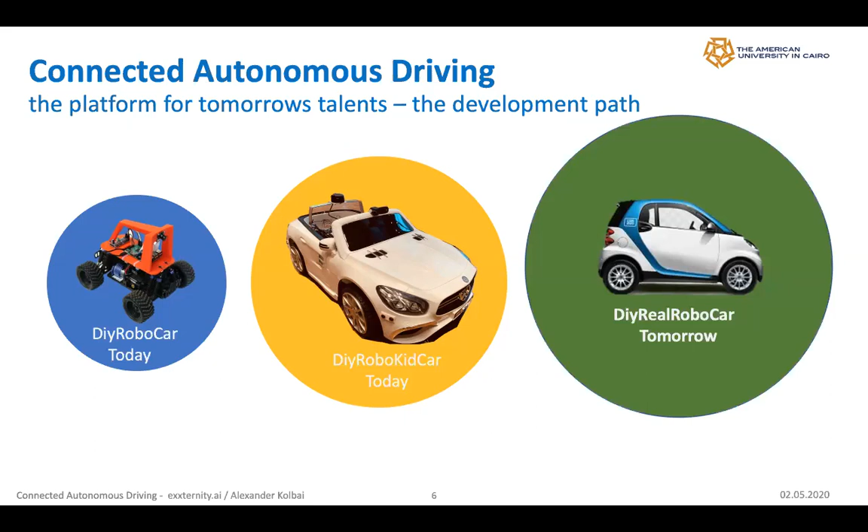And I'm also getting now to a bigger step. I'm building, or I built, let's say, a medium-sized kid car equipped with a lot of technology. I will come back later to this project, and the target is that after we get experience from the yellow from the Mercedes, we will equip one day a real autonomous car or a delivery robot or something like this.

So, if you're talking about autonomous driving, it's good to have a look back at the history, because autonomous driving is not new. There was a professor in Germany at TU Munich. Maybe you heard about the Hyperloop events from Elon Musk and TU Munich - they won this Hyperloop event 3 times, and now they are building their own Hyperloop.

One of these professors in 1980 was Dr. Dickmanns, and he was the first to develop autonomous driving together with Daimler. You can see some pictures here in the slide. In the year 1995, they drove from Munich to Odense in Denmark.

95% of the driving was autonomous, and this was 1995, so about 25 years ago. What they used was not modern technology as we know today - the hardware wasn't as capable, as strong or as fast as what we have today - but they had good algorithms and things like this.

But what they did is something like what you know today from YOLO, from object detection. They used a system they called machine seeing, so they made bounding boxes around objects and calculated the distance between their own car and the cars in front of them. This made it possible to drive the car on the street, and also make bounding boxes around the line marks on the street, what you know today as line following and things like this.

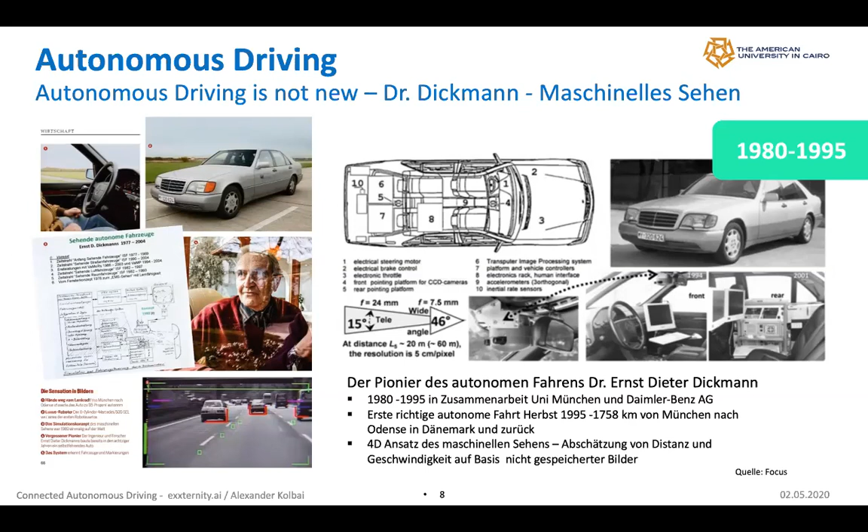And you see, this is not something new. Also in 2004 in the US, DARPA, the American Defense Organization from the American government, started a challenge in the desert, in the Mojave Desert in the US, and they gave the challenge of riding 240 kilometers completely autonomous. The people had to start the car, and the car had to run the 240 kilometers completely autonomously - nobody should intervene with the car.

In the first race, the car came only 12 kilometers, and then the race was over. Nobody reached the real finish. This was quite funny. So here's some videos of it.

Autonomous driving is very famous also from one company called Google, or now called Waymo. They started in 2009 with Sebastian Thrun, a German guy who was the founder or chief of the Google X department. They started to build autonomous cars already in 2009, and very famous was this small car which was everywhere in the media. They collected a lot of experience and a lot of kilometers in this car, and also found out how people react to this kind of car.

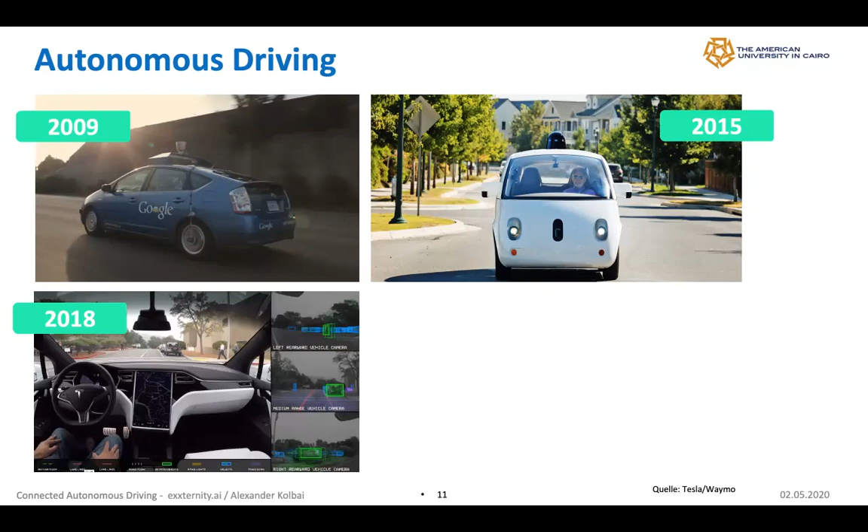And here you see the latest invention. It's a Jaguar, an autonomous Jaguar from Waymo, which they brought to the streets now. And they already have the license to drive completely fully autonomous in Phoenix, Arizona, and drive this car there.

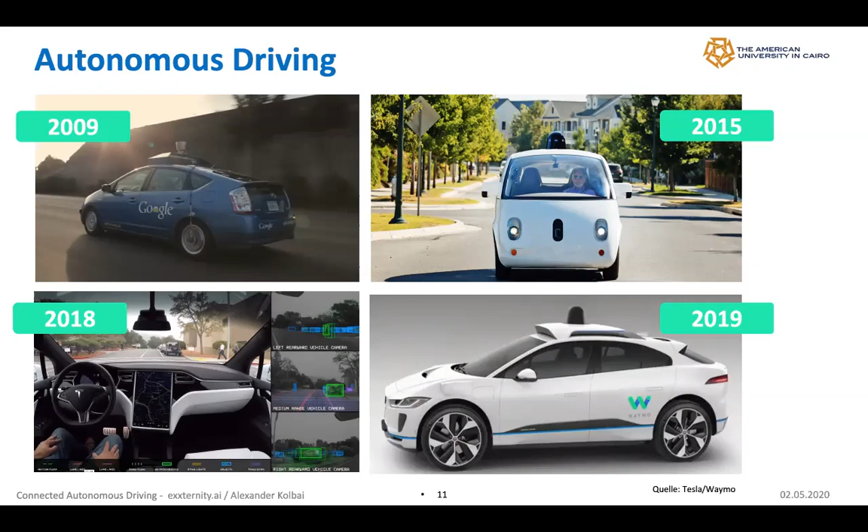Hashan, you still hear me? Yes. Okay, next, we can hear you very well. Okay, thank you. So if you have any question, please interrupt me, and if you don't hear me anymore or don't see the slides anymore, also interrupt me please.

So if you're talking about autonomous driving, we have to talk about different fundamentals. I will say, for example, about the 5 levels of autonomous driving. So we have 5 levels.

Level 0 is no automation, and level 1 and level 2 is what we already see for the normal OEMs which you know on the streets. They have a driver assistance system, partial automation, like line following, braking assistant, parking assistant, things like this. Audi also announced to come to level 3, but they announced 2 days ago in the media that they couldn't find a legal agreement with the European governments to bring out a new Audi A8 with traffic jam automation, which was driving the car at level 3. So all the OEMs actually are only driving level 2 or level 2 plus.

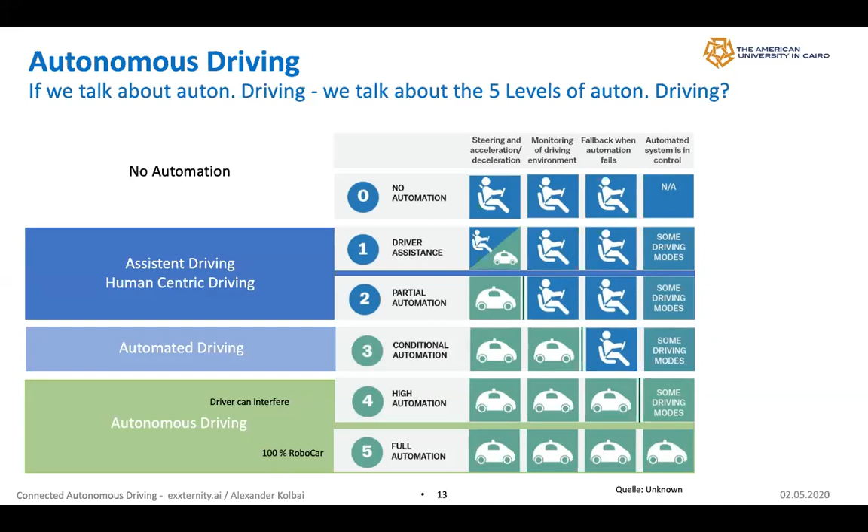And this makes things very complicated, because you will have non-automated cars on the streets, assistant driving cars, automated driving cars, and maybe a couple of autonomous driving cars. The organization of this will be very difficult.

And they also need to have the connection to the infrastructure, because they will communicate with the cloud, with the companies, with the central servers, and also with other participants on the streets, like pedestrians, bicycle riders, motor drivers, and things like this.

Autonomously, we are talking about what we discussed in the slide before, about assistant driving, automated driving, and autonomous driving. S stands for shared services, safety and security, which is much more important to me than shared and services, because safety and security, especially when talking about autonomous or automated driving, is a very important case, and also the part of IT data and information security.

Electric is a very important part for the future. We are talking about battery, H2, charging, battery production, and better efficiency programs.

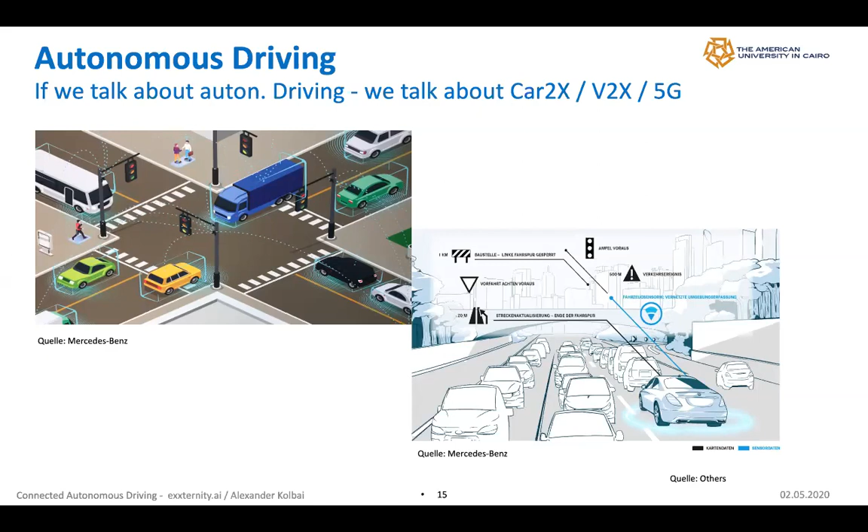For example, if you're driving along the street and there's an accident 2 kilometers in front of you, you will automatically get the information in your car: there will be an accident in 2 kilometers, or an icy street, or water on the street, or things like this. So this is very important for automated or autonomous driving.

If we also talk about autonomous driving, we have to talk about design and system development. The most important task is designing and developing a system that enables all driving tasks to be performed by the car, so the driver is fully free from driving. Another point is accuracy.

The vehicle must master all situations without the driver having to intervene. The car must be able to drive completely alone. And this is the real challenge.

We see different engineering mentalities in the US. They think it's enough if the car is good enough for 70 or 80% to drive on the street, and the rest of the experience we get on the streets. The German engineers say, okay, if the car is not fit for something like 101%, we don't give it out. So I think German OEMs are already able to drive autonomously, but there are a lot of different mentalities and security issues which don't allow us to bring these cars directly onto the street.

And also because we have a different customer experience of what they want on the street, because we saw a couple of accidents from Tesla, and they were all in the media about the autonomous drive standard in Tesla, which is still in a beta version, or they say it's not autonomous driving, it's only assistant driving. But a lot of people accepted it as fully autonomous driving.

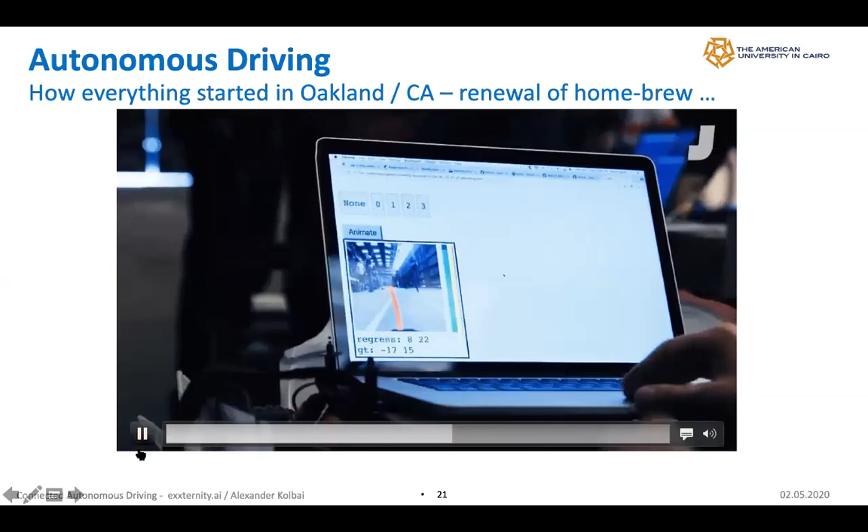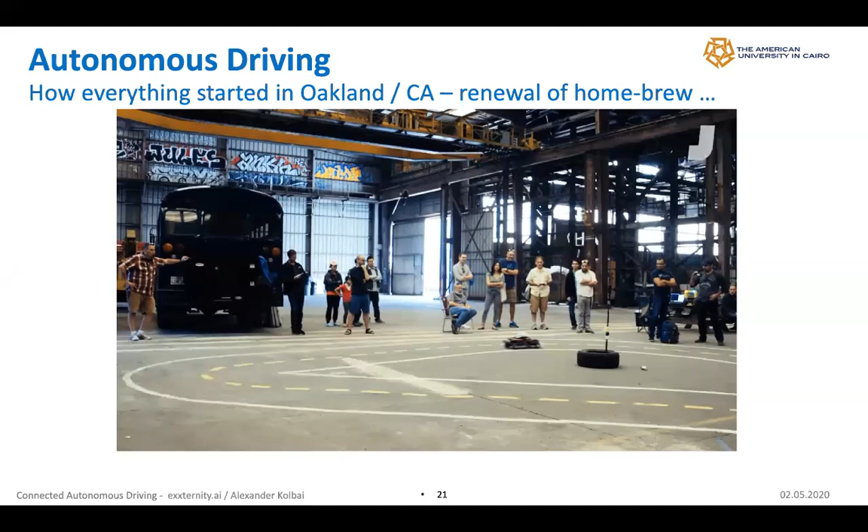What you can see here is one of the events they did in the United States. We do the same events here in Germany, a little bit smaller. But what you can see is that these are normal people - they are not people from the automotive industry. Maybe some of them are, but they are experimenting in autonomous driving at a very low level, and they have a lot of fun. Chris Anderson always says that if you do such events, it's important that you have a lot of fun together and things go well. Now I will come to the car and explain the technology in it.

It's quite simple - so it has a camera.

It's used to record the street and the lines. It has a Raspberry Pi or NVIDIA Nano, and it has a PWM board. The PWM board is important to control the motors, control the steering, and the motor board controller.

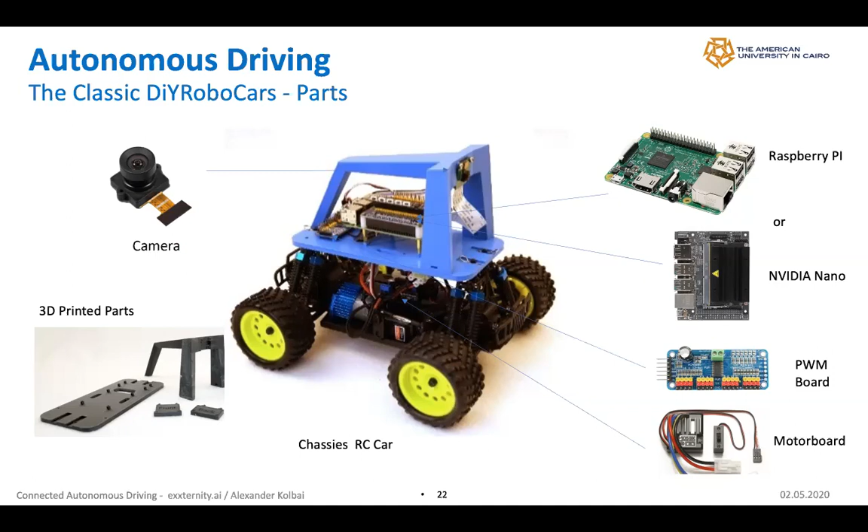So it's very simple. The chassis is from a simple RC car, which you can buy everywhere. The rest is mainly 3D printed, which is also easy to get, or you can buy it. The complete car costs around 300 bucks, 300 euros, and you have a small autonomous car. You need a controller for it, that's it, and a little bit of software which you can download open source from the internet. Then you can start to learn driving an autonomous car.

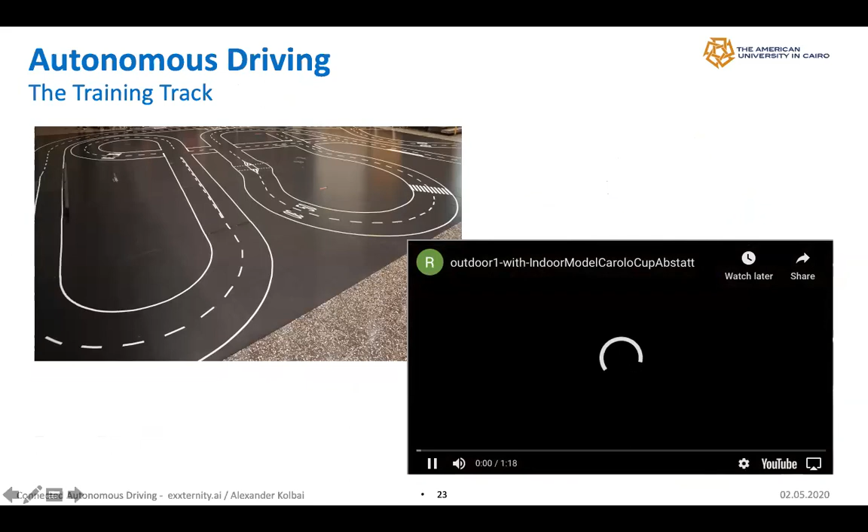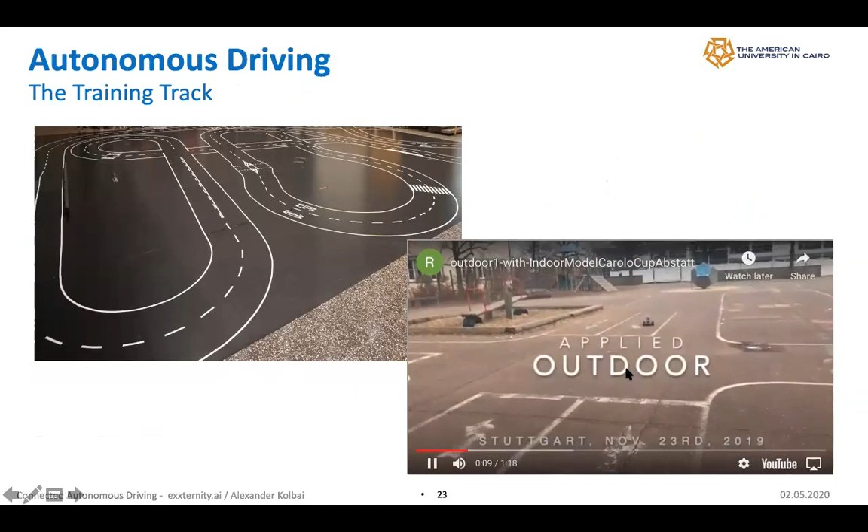So what is this car doing? It's what you see now here in the video. It's driving along this course, collecting the information of the course. It can also be an outside course - it's important that it has lines outside, and lines inside, and you can see it learned from the lines. Sometimes it didn't learn very well and does its own thing, what it wants.

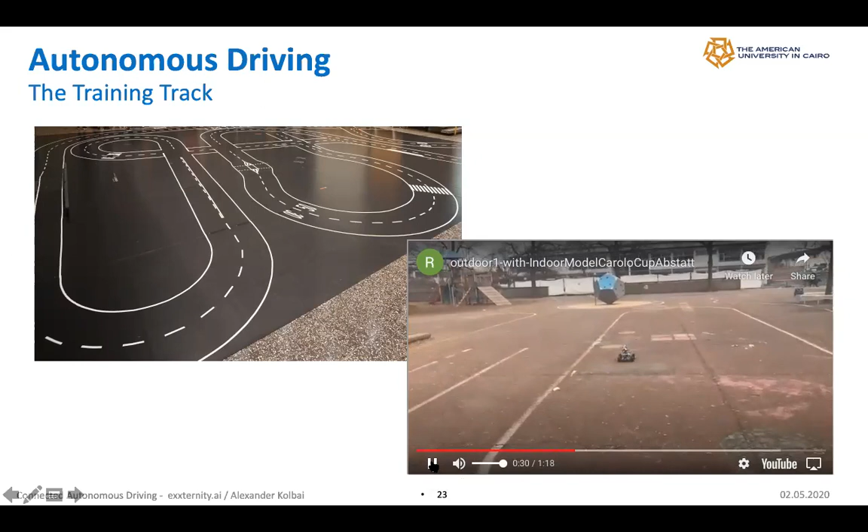So what is the system behind this? First of all, what we are doing is driving the car with a control around the course. In the image on the left side, you see the street or the race course. It has a left line, a right line, a middle line, and these three lines are recorded by the camera from the car. Then this information is taken, including the speed and the steering information, and collected into data.

This data is transferred from the car to a computer - you can use a laptop, your normal PC, or if you have an NVIDIA Jetson Nano on the car, you can directly leave it on the car. Then you train this data - I'll show you later a little bit what the network looks like. Then you create a model, put this model back on the car, and hopefully it will drive the course completely autonomously.

We call this behavioral cloning or imitation learning, because it learned that the street has a left line, a right line, a middle line, and when it sees something like this, it knows how to go along this kind of street. So it's a very simple idea of autonomous driving. But what we are also doing now is putting some obstacles on this track, and the car learns to recognize these obstacles and go around them.

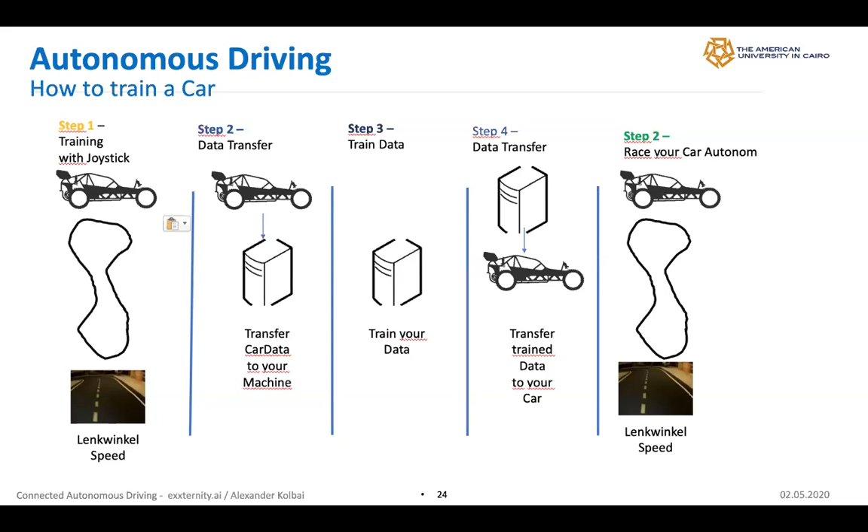So that's what I said before. First of all, we have this control, we race this car around the course, then we train it through a neural network.

Or we have the possibility to use this kind of simulator. Let me see if I can show you the simulator here. So if I have now connected a joystick, I can drive - let me see if my joystick is working here on this computer or not.

So I can drive this car in the simulator around this course, and collect the same data as I would normally on a real track, and also train it through the neural network. I'm too fast. So we'll stop, and exit.

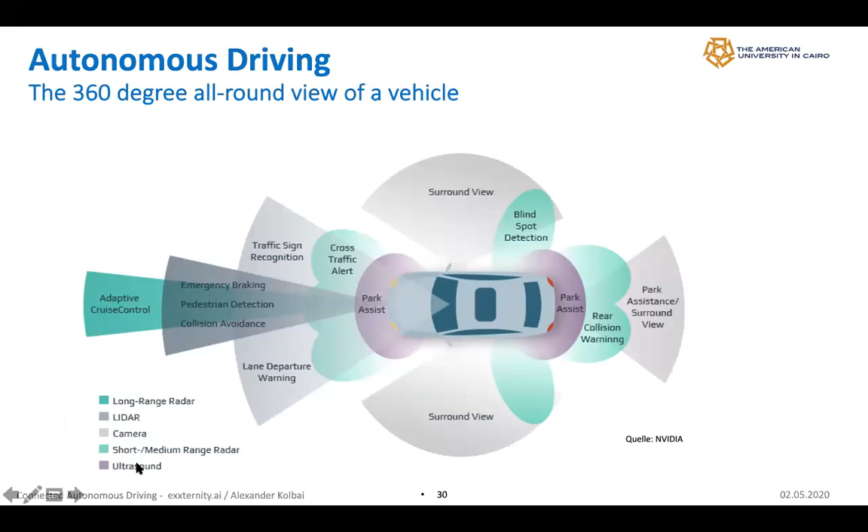So if you come now to DiyRoboCar, this was a very simple idea how to learn autonomous driving in a very simple way. But we said, okay, this is very simple, and we want to be more like a real car, which has a radar, a LiDAR, cameras, short and medium range radars, ultrasonics. So a couple of different or much more sensors, which the normal donkey car doesn't have. What we have in the donkey car is the camera, that's it. We collect the steering and the speed, but we don't have a radar sensor.

What you see here is the new radar sensor from ZF. It's very close to being like a LiDAR, but only in one direction. The good thing is it already has 192 channels, and you can create a point cloud out of it. What we also want to have in a real car is a LiDAR, whether it's a 2D LiDAR or a 3D LiDAR, and different ultrasonic sensors.

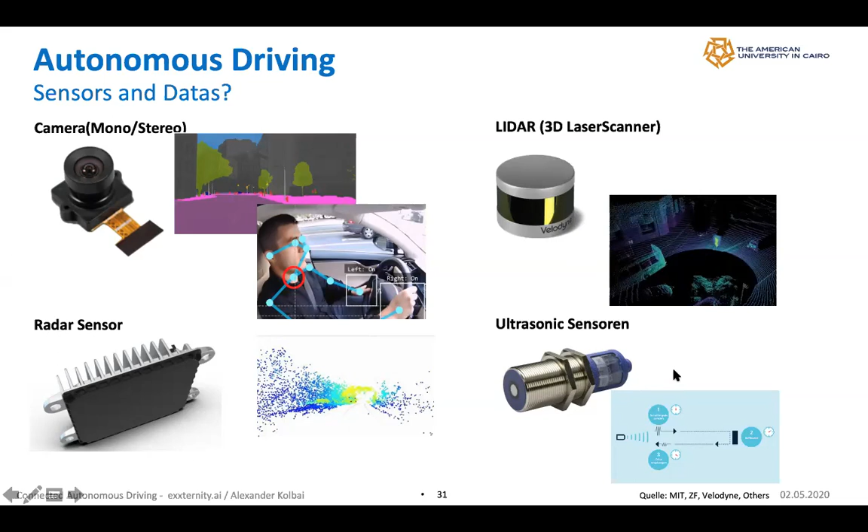So what we did is start to use a kid car. At the beginning, I used the kid car from my daughter, which I had in my cellar. It was an old Porsche. When she was 3 years old, she got it, and it was left in the cellar, and we equipped it with all this equipment you see here now.

And then we started to make it a little bit more sophisticated and equipped a modern Mercedes with modern technology. It has 2 cameras, one in the front, one on the top. It has a GPS connection, around 6 ultrasonic sensors, one in the middle, one on the left side, one on the right side, and the same in the back. It has a 2D LiDAR, a 3-axis gyroscope, cameras as we already said, GPS, and a panel.

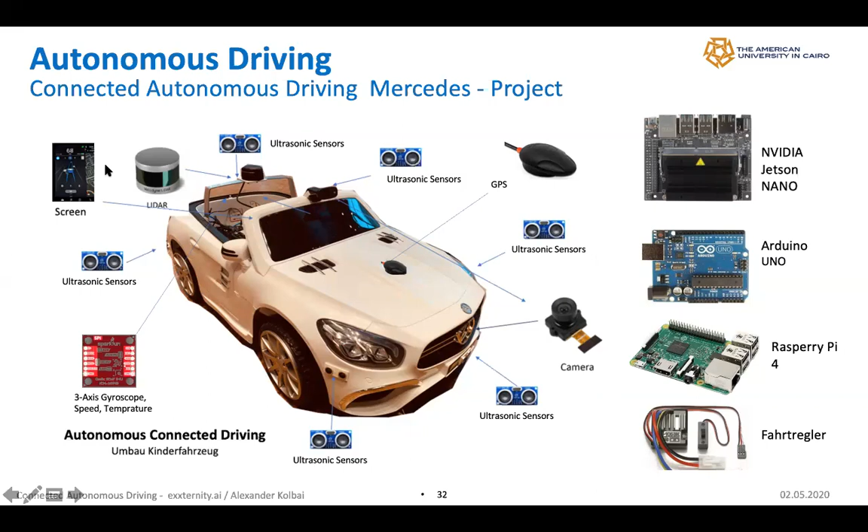So here is a small photo from yesterday. We drove the car around the street around our house, and I can show you some small video from it.

So what is the car doing? The car has a GPS line, and it's following the GPS line and controlling the driving according to its sensors.

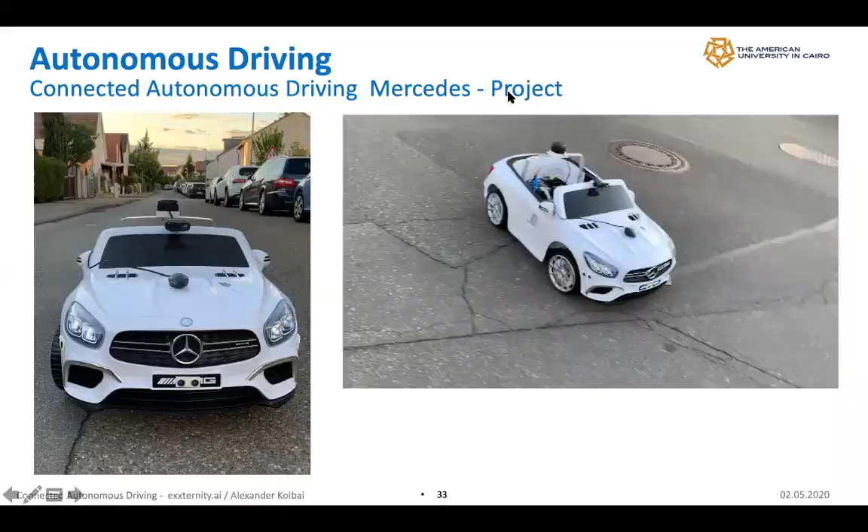I can show you now, I have this car here. Let me share. Can you see the screen from the car now? Yes, okay. What you see here on the left side are the ultrasonic measurements, which are collected.

They are recorded on an SD card. We have the LiDAR information. This is the LiDAR information you get now in my room here, because the car is standing next to me on the floor, and we have the camera also here.

We can use directly YOLO on the car. It's built in, we can directly make object detection with YOLO on the car. But here it makes no sense in the room to show it, but let me see if I have some videos here. We can do it later on.

So this car has a lot of sensors, and I will get back to the presentation.

Can you see the GPS information now? Yes, okay, so this is what we collected yesterday, for example. We drove the car around our area, and first of all, we collected the GPS information from this area. So the GPS sensor took the GPS line.

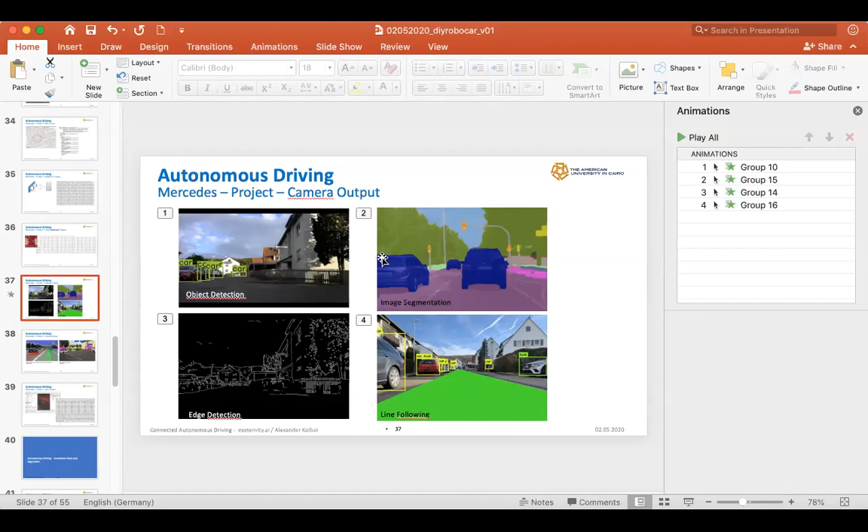So back to the presentation. This is the output which you can get directly from the car. You can see here the object detection made by YOLO from the car. So he detects everything. My daughter already jumped sometimes in front of the car. He also recognized street signs, important.

So you give the camera or the car the information about what he's seeing over the camera, because the driver is not steering the car. That's why image segmentation is a very important technology, because you can use it internationally. If we're developing autonomous cars, we develop them internationally. So this kind of information you can use in Germany, in Egypt, in Japan, in the US, because everywhere you have cars getting a blue color, the streets getting this pinkish color, the sky, the lighting systems and things like this, and you have an international standard to use it.

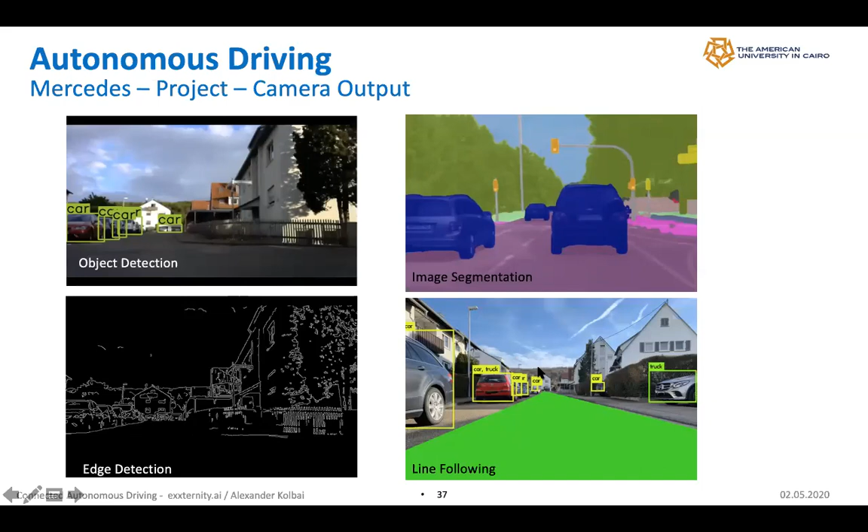We use this kind of edge detection so the car can predict where he is going and can see the street. And also this line following combined with YOLO object detection. This is a street where the Mercedes was going yesterday, so he knows where he can go and which is the space he can use.

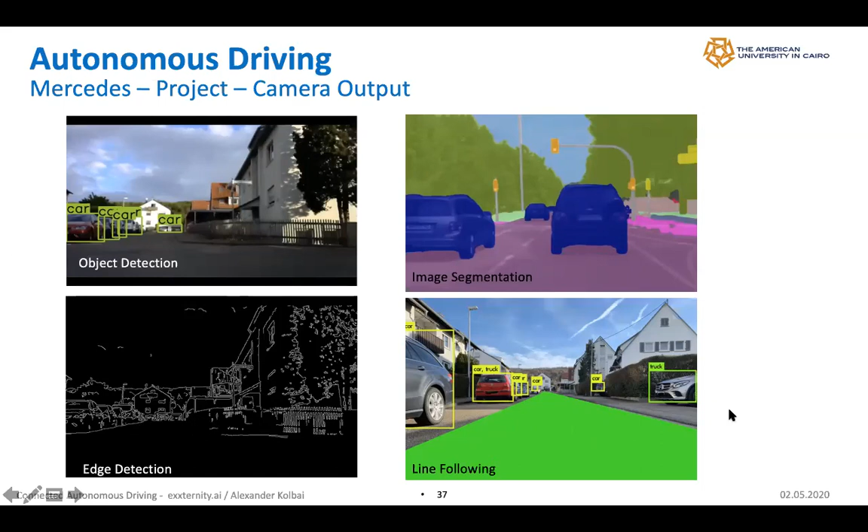And last but not least, the LiDAR information, what we collected from the LiDAR, which we can run in the RViz, and the Mercedes car, for example, is running on a ROS environment, combined with other different algorithms. So we can use the LiDAR on ROS and get all the information from the LiDAR and all the objects around, because the good thing about the LiDAR is that it allows us to get a 360 degree view around the car. For example, if you have a radar, you only see in one direction.

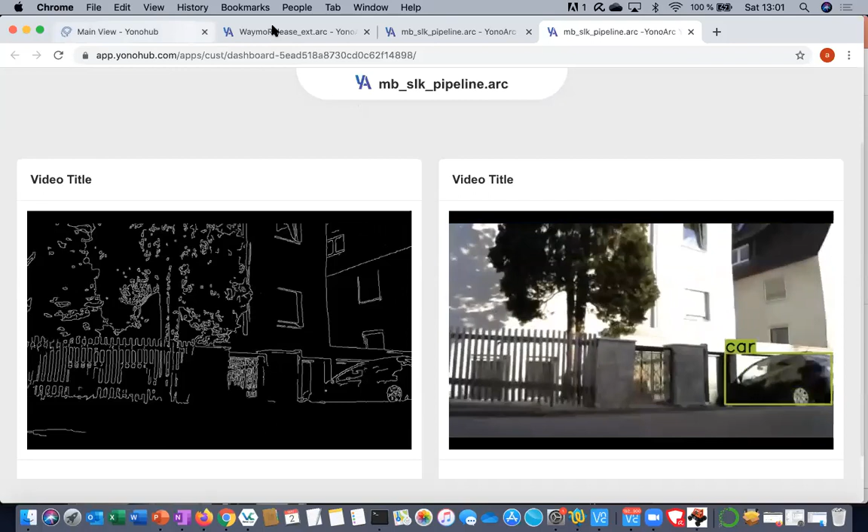So what is YonoHub? It's a platform - I'd call it an AI development, testing, simulation, and collaboration platform. On one side, you can develop your own algorithms, for example in Jupyter or Visual Studio, and then put them into blocks, which you can see here. These are the blocks, and it's very easy to create your own environment.

I'll stop here and show you how easily it's possible to do this yourself. So I have, for example, a video player, then a video viewer - let's say we have two - then I'll use YOLO detection, what we had before.

Then edge detection, and we need some boxes which will be drawn from YOLO around the objects. Now, I'm not a developer, but I can use YonoHub to build my own pipeline. So very simply, I'm connecting these blocks by marking them, then Control E, and it connects them to each other. I'll do the same with the rest of the three blocks, and that's it.

The only thing I need to do now is browse to my video, which was recorded from the car. Let me see the videos. I'll take another one, not the same one you saw before. Okay, I'll call it 'test', save it, and then I can start the pipeline - you can see different colors appearing down there.

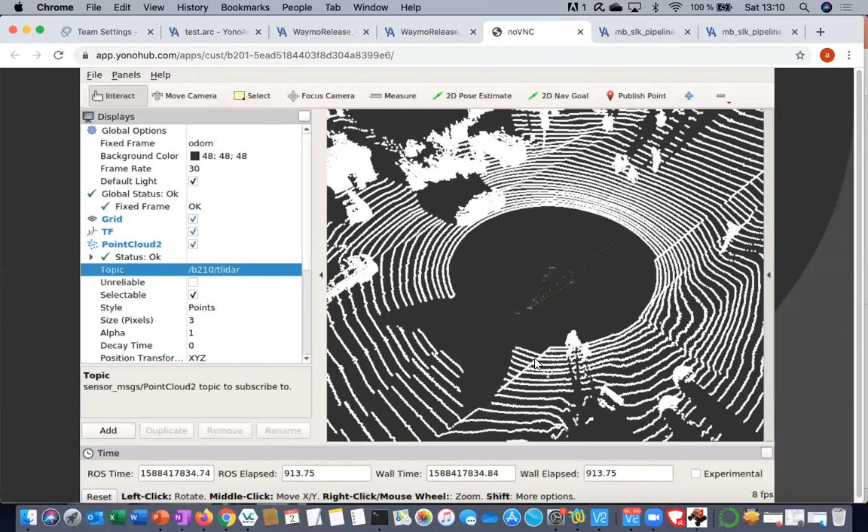So this is different. This is the front camera. This is the side camera, and here you can see the people walking along over the pedestrian street, what you saw already in the LiDAR information. Let's see. Here you can see them walking over the pedestrian street. And you see also here different kinds of cars, bushes, houses, and things like this.

So all this information we can visualize in YonoHub. We can develop our own algorithms in it, stuff them into blocks, build our own pipelines, test this data, see what this data gives as feedback, optimize this data.

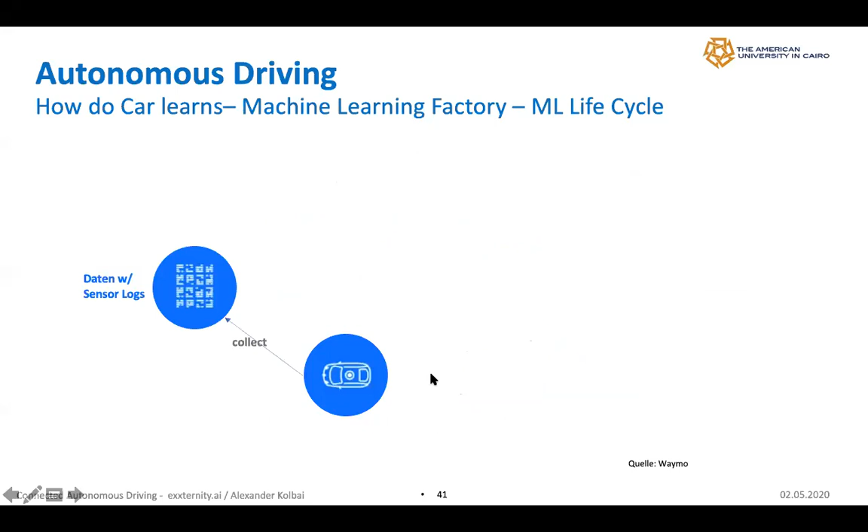So the main thing from Waymo is, first of all, they're not concentrating on building a car. They can use any car. But what they are doing is concentrating on developing their own sensors - cameras, lidars, radar, ultrasonic sensors. They have their own algorithms like TensorFlow and others they are producing. They have their own data centers, very huge data centers, and they have the money to get the best people in the world to develop autonomous driving for them.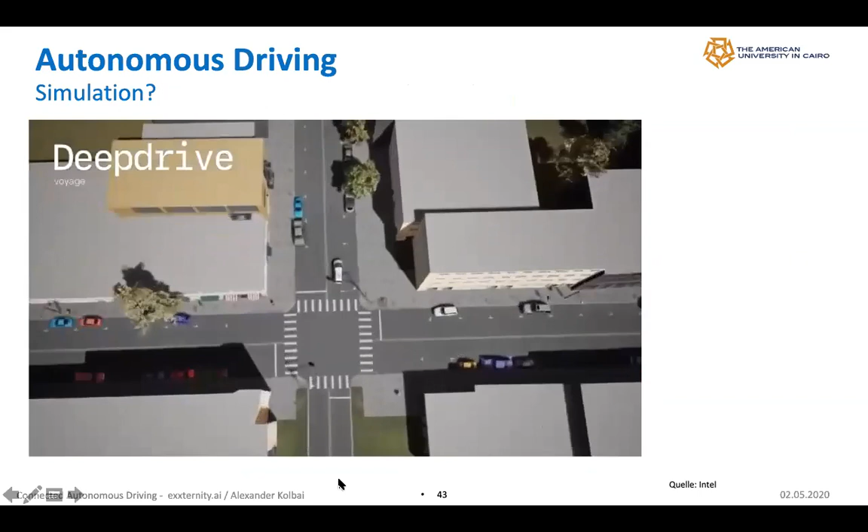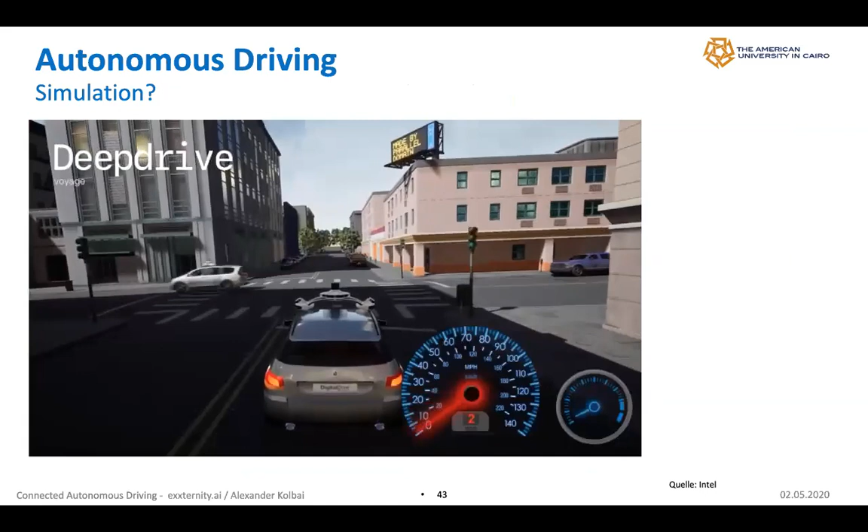One of the famous simulators is Deep Drive. It's from Voyage. Voyage is a company also in the US, coming from the Udacity team. This was outsourced from them, and they developed a simulator. It's like a real video stream on the street, called Deep Drive, and these kind of cars collect all the information in the simulation.

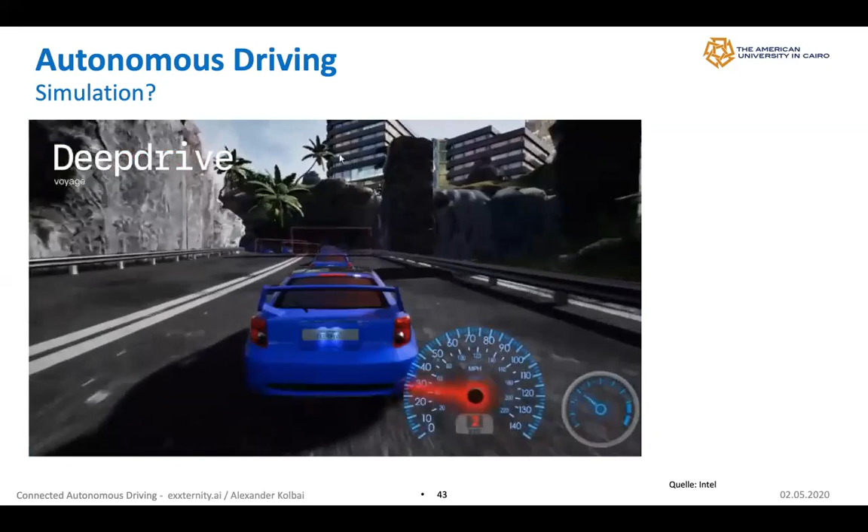The good thing about simulation, what you cannot do on real streets, is that you have special situations like what you see here now. For example, a ball runs onto the street, or some obstacle is on the street which is normally not there. You can produce all this kind of scenery which you don't have on real streets every day, and which you cannot collect with normal cars. This is the good thing about simulation.

The live demo we already saw before. So what is our aim?

When we go back to the DiyRoboCar number 2, which has the different sensors, the next step should be to put this framework on a kind of delivery robot, not a real car, but first on a delivery robot, and see how it works, because it has the same sensors as our Mercedes. It has a LiDAR, ultrasonic sensors, cameras, and can be controlled externally. If this works, we can start trying to put such a framework on a real car. So this is the idea: from the pipeline on a very small DiyRoboCar, or a bit bigger with more sensors, then going to a delivery robot, and at the end putting something like this on a real car.

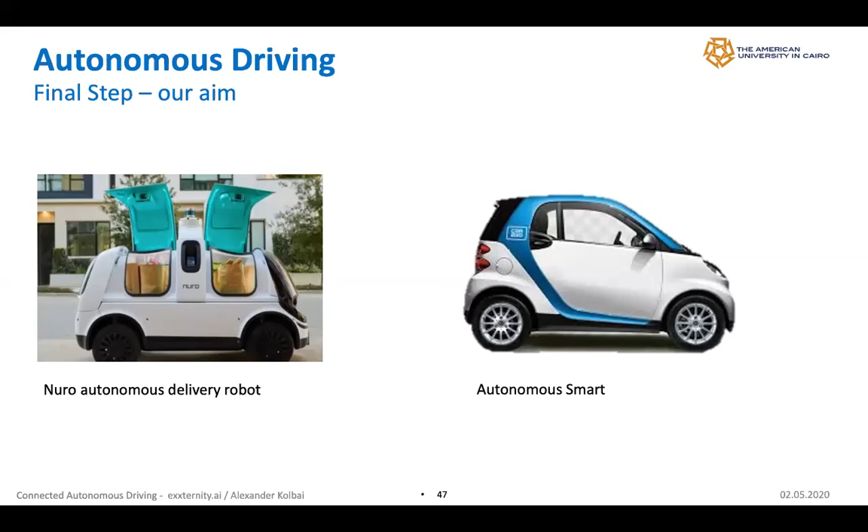That's why we call this democratizing autonomous driving, because this is something not everybody can do, but everybody who is interested in autonomous driving can get into this technology. The frameworks are available, the data are available, the tools are available, and there are a lot of teams around the world working in this area. It's a fascinating technology, a fascinating future technology, and very, very interesting.

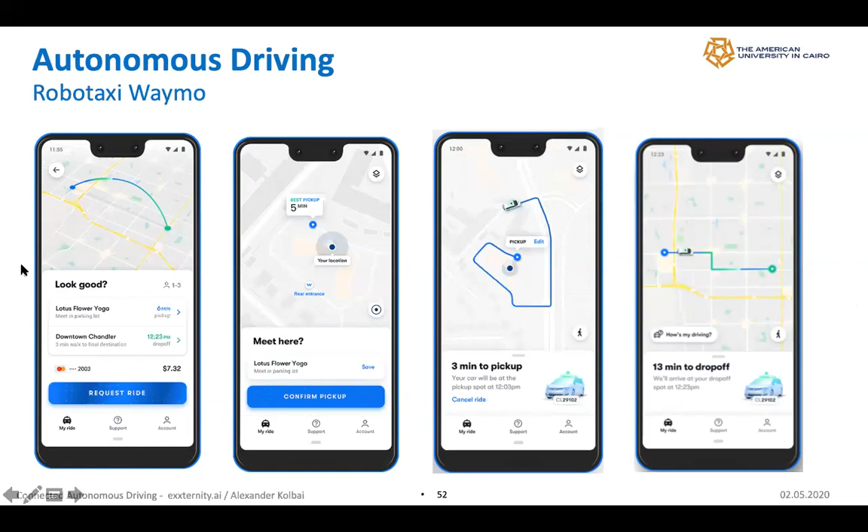So where we are today: the traditional OEMs are somewhere between L2 and L3 assisted driving. There are a couple of companies, let's say L4, but still with a security driver - especially Waymo, Voyage, and I think Tesla will be very soon there. There's also Cruise, an American company.

What is coming more and more are these autonomous shuttle buses. There's a company called Navya, a French company, and they already have around 150 shuttle buses implemented worldwide. They drive autonomously in a defined area, working the same way as I showed with the Mercedes car.

First, they collect GPS data, so the shuttle bus knows where it has to go, and they use the rest of the sensors only to detect obstacles around them and decide how to act with those obstacles. The next one is air taxis.

Maybe you heard about Volocopter. It's a company from Germany, also invested in by Daimler. But I'm not so sure if this will be the next big thing, because I don't want to have as many air taxis in the air as we have cars on the street now. I don't want to have any of them over my head.

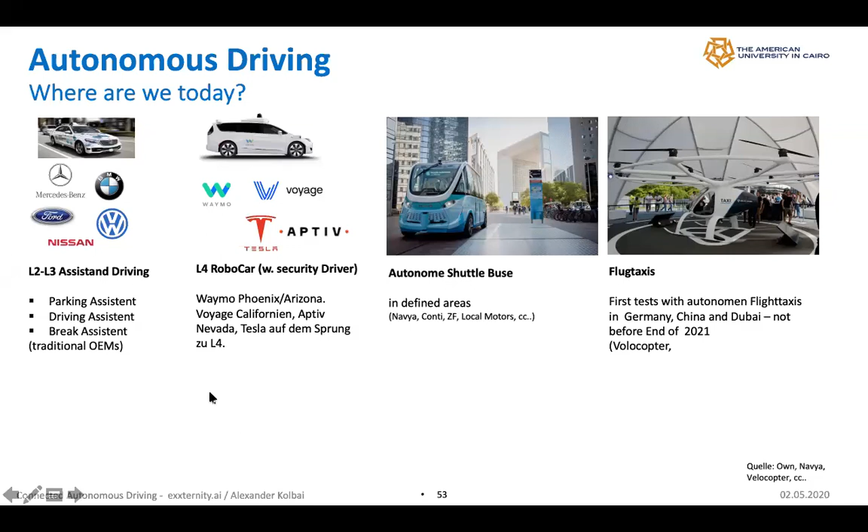I think there will be a market for it, I'm sure about that, but it will be something like a helicopter for special locations - like Dubai or New York - where you fly from A to B in a very limited area. But where we already have autonomous driving is in the logistics area.

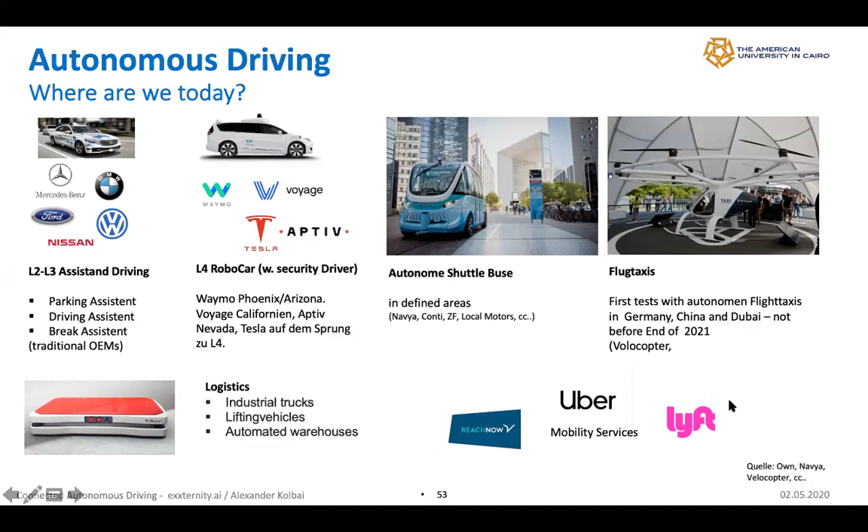There are a lot of industrial trucks and lifting vehicles operating autonomously, and we have a lot of autonomous warehouses. What we actually see is that all these ride services and robotaxis will grow very fast in the near future.

There are two books about DIY RoboCars - one is a magazine called Make, and the other book is in German, from a friend of mine. He called it RoboCars with the Raspberry Pi. It's a very simple description of how you can build your own small robocar with a Raspberry Pi. I think it will be available soon in English as well.

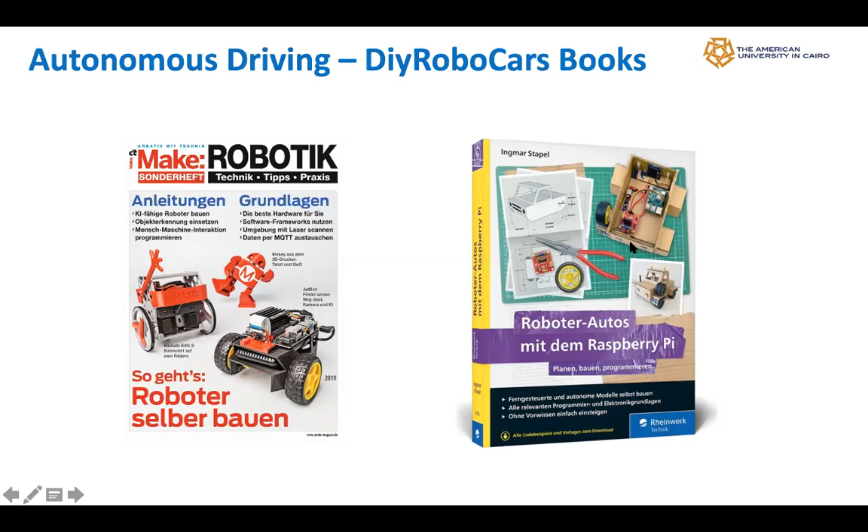Even the German book is interesting because it has a lot of code, pictures, and descriptions - everybody can understand it even if they can't read German. It gives a good idea of how to build your first small autonomous car with different sensors like cameras, servos, ultrasonics, LIDARs, and things like this.

This was it from my side - a short introduction on how you can build your own autonomous car, or your startup for an autonomous car, and how we can learn from each other. It's an international movement, and a lot of people are working on this idea and these platforms, and it's growing very, very fast.

And the good thing is that as more people work in this area - also privately - and get their own experience, it becomes easier for the bigger OEMs to recruit people to get their cars on the street. I think we will see a big shift from the normal car to automated or autonomous cars in the next 10 years.

We already see it in the US - if you go to Silicon Valley, or if you go to China, there are already a lot of cars like this. We see it in delivery systems which will come up, and we will see it in robotaxis. So I think it's an interesting area.

To put your nose into - it's a mix of development, hardware, good ideas, team building, working together even across country borders. For example, YonoHub is a company in Cairo, and I'm working with them from Germany here, and we have customers also in the US.

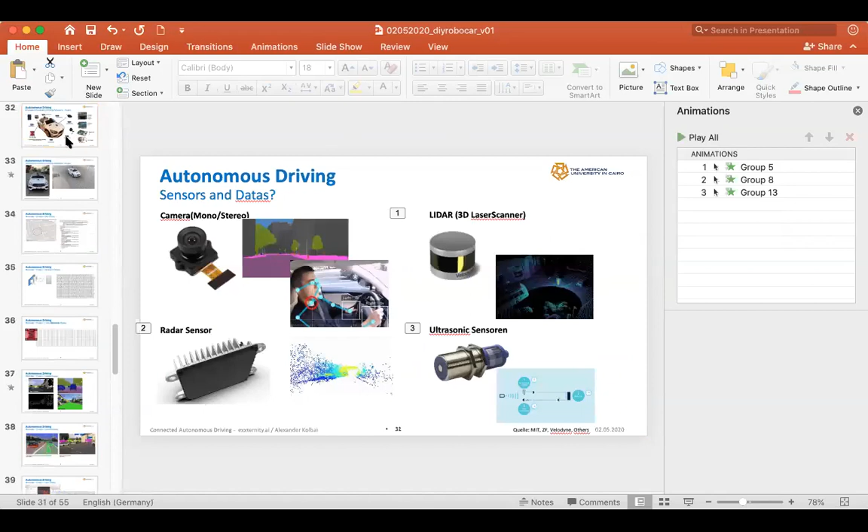Well, I have a question. Sorry, I'm Haitham. So in one of the slides, you said that you used reinforcement learning for the model generated from the simulator data. But for the data collected from the real car, you used imitation learning. So I was just wondering.

No, you can use both. There are different technologies you can use to train such a car. You mean this slide which I have here now? You can use different technologies to train such a car - you can use imitation learning or behavioral cloning, or you can use the simulator and train a car with deep reinforcement learning technology. So there is no advantage to using reinforcement learning for the simulated data.

The point is you can learn different kinds of algorithms. This is the good thing about it. So it's kind of an experimental studio, and you can see what could be the better outcome of it.

Oh, okay. So, for example, if you use a simulator, you don't need a real car, because you can put the model on the simulator and see how it will work. And actually, there is one movement now coming also from the US and from Canada. We meet every 3 weeks and race our simulated cars against each other.

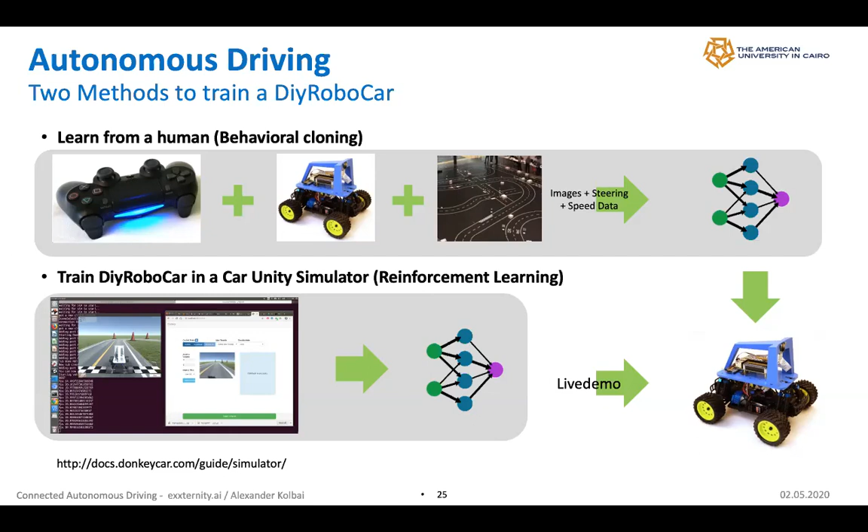Yeah, no, I don't think that they reached it, but they are experimenting not only with cars, they are also experimenting with, for example, drones. Yeah, what's it called? It was also a Google company. This - Boston Dynamics, which was bought now by a Japanese company, I think.

They're investing a lot now in military robots, not only vehicles. So DARPA is investing in a lot of different subjects. They put their money in, maybe you've heard about SimCoach.

For example, the American Army has a lot of soldiers in the field, but they don't have so many psychologists in the field who can talk to the soldiers if they have any traumatic experience. So they developed a system called SimCoach. It's a kind of virtual reality psychologist, which a soldier can talk to as if it were a real psychologist.

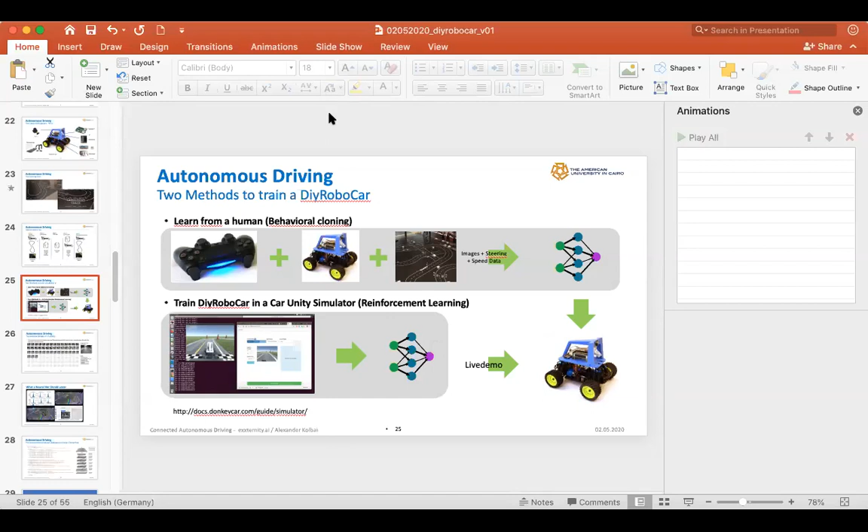Yeah, just one last question. What kind of simulator would you use? I know you mentioned ROS for development. Yeah, ROS is not a simulator, but what we are using is Carla, what we are using is AirSim, what we are using is this DIY RoboCar simulator. What I'm experimenting with actually is Deep Drive, but it's not so easy to get it implemented already. The support is very low-level actually, but hopefully I will get it running very soon.

I think there are a lot, Gazebo for example. If we speak about ROS, we can use Gazebo as a simulator, but it's not very good. If I had to prefer a simulator, I would say Deep Drive is a very good simulator actually. And what is also very good as a simulator is AirSim. We are also working at Avelabs for YonoHub to make a connection to both of these simulators.